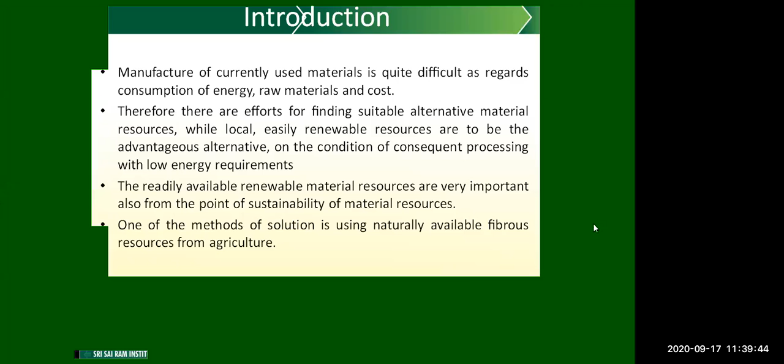Sharing, sir. Good morning. Shared? Yes, just sharing is showing, not the PPT. I'm Dr. P.K. Chidambaram. Good morning, sir. It's showing just screen sharing. Full mode. PPT is not coming. Prabhudas, is it visible? No, PPT is not visible, sir. Not visible, sir. Yes, sir. It is okay, sir. Visible. Now it is visible? Yes, it is visible, sir. Okay, shall we start? Yes, sir. We'll start, sir.

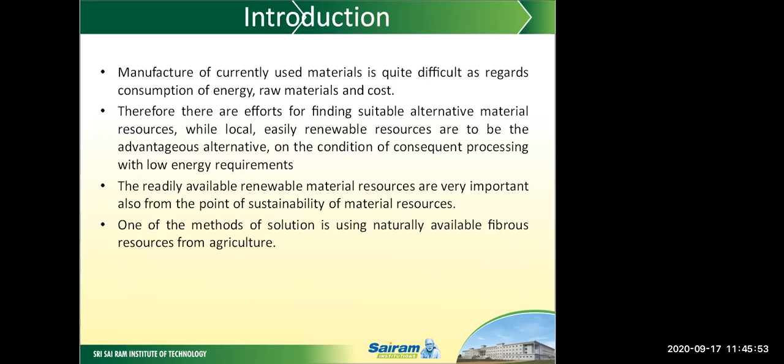The manufacture of currently used material is quite difficult as regards consumption of energy, raw material, and cost. When you are making the material, if you are able to reduce the energy consumption, this is also maintaining the sustainability. The sustainability maintenance for making the raw material is very, very difficult. Therefore, there are efforts for finding suitable alternative material resources, while local, easily renewable resources are the advantageous alternative on the condition of consequent processing with low energy requirement.

When you are using the local and easily available renewable material, these are alternative materials, and when you are making the components using these materials, you are able to save the energy. Also the manufacturing cost for the components can be reduced. So these materials require only less energy. With less energy, you are able to make the components easily by using renewable materials like biocomposites, which are produced from the plant fiber.

The readily available renewable material resources are very important also from the point of sustainability of material resources. So the readily available renewable material resources, which are available from the plant, are very, very important and are finding many applications, so that these materials can be easily used. One of the methods of solution is using naturally available fibrous resources from agriculture. If you are able to get the material from agriculture, these are the materials used for making the composites.

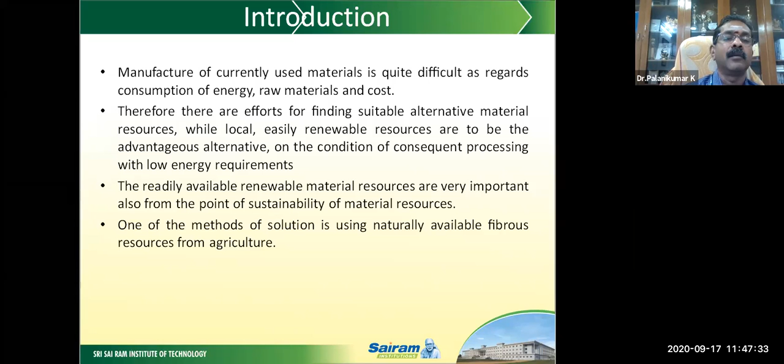The fibers extracted from plants are a type of renewable source and a new generation of reinforcements and supplements for polymer based materials. These fibers are renewable and cheaply available, and these are completely or partially recyclable. When you are talking about the plant fiber, almost all the plant fibers are completely recyclable. But when you are using this with synthetic resin, then this is partially recyclable. If you are going to use the bioresin, then the plant fiber and bioresin composites are completely renewable.

So these are naturally available when compared to the manufacturing of glass and related man-made fiber. These fibers are easily plucked from the plant, and we are able to have these kinds of materials very easily. These are biodegradable and environment friendly materials. Their availability, low density, and price, as well as satisfactory mechanical properties, make them attractive alternative reinforcement to glass, carbon, and other man-made fiber. So these kinds of materials are very useful in industry, even in the home, because of the price as well as satisfactory mechanical properties.

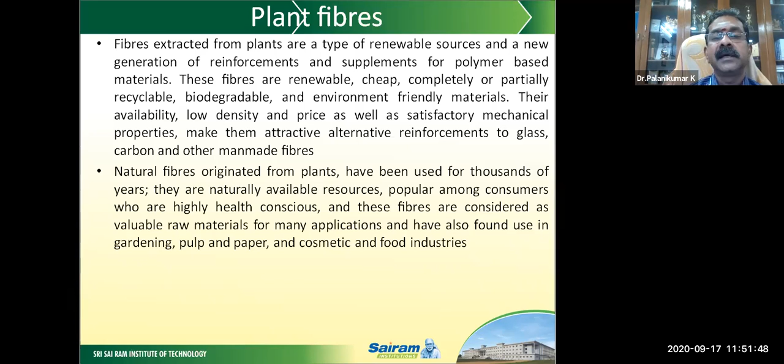They are naturally available resources, popular among consumers who are highly health conscious. When you are talking about people who are living in the forest and interior areas, even nowadays they are using the plant fiber for the construction of roofs and related material. And these fibers are considered valuable raw materials for many applications, and they have also found use in gardening, pulp and paper, cosmetic, and food industries. So using the plant fiber, we are able to have a lot of applications.

The fiber from plants such as cotton, hemp, jute, sisal, even pineapple, ramie, bamboo, banana, etc., as well as wood and the seeds of flax are used as the reinforcement in polymer matrix composites.

So when you are seeing the plant fibers, even those which are nearly available to you, like snake grass and milkweed fiber, these kinds of fibers are very easily available near you. If you are able to pluck them from the trees and convert them into fiber, these fibers are useful for making many products.

Among all the fiber plants, areca appears to be a promising reinforcing material because it is inexpensive, abundantly available, and a very high potential perennial crop. It belongs to the family Palmaceae, originated in the Malaya Peninsula and is cultivated in India and other countries in Asia.

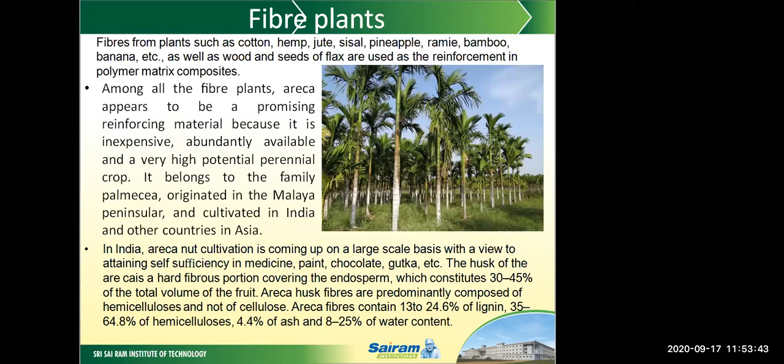For example, in India, areca nut cultivation is coming up on a large scale basis with a view to attaining self-sufficiency in medicine, paint, chocolate, gutka, etc. So these materials are used for manufacturing and making paint, chocolate, gutka, etc.

The husk of the areca is a hard fibrous portion covering the endosperm, which constitutes 30 to 45% of the total volume of the fruit. Areca husk fibers are predominantly composed of hemicelluloses and not of cellulose. Areca fibers contain 13 to 24.6% of lignin, 35 to 64.8% of hemicelluloses, 4.4% of ash, and 8 to 25% of water content.

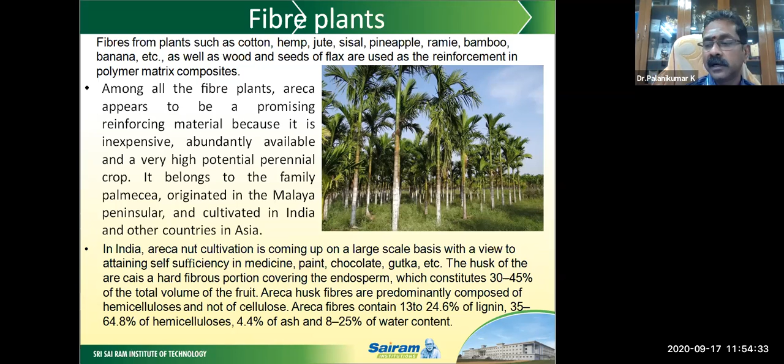Approximately 70 million metric tons of bananas are produced every year by the tropical and subtropical regions of the world. Even in Tamil Nadu, banana cultivation and the use of banana is extraordinarily widespread. Even in interior areas, wherever you go, we are able to see the banana tree.

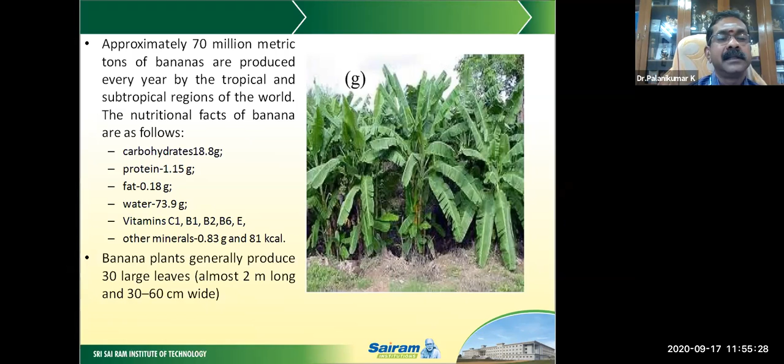The nutritional facts of banana are carbohydrates, protein, fat, water, vitamins, and other minerals. So the banana plants generally produce 30 large leaves, almost 2 meters long and 30 to 60 centimeters wide.

Hemp is another natural material which is abundantly available, and in many places they are growing hemp as an alternative resource for polymer composites. Hemp is naturally one of the most ecologically friendly fibers and also the oldest crop. The Columbia History of the World states that the oldest relics of human industry are bits of hemp fabric discovered in tombs dating back to approximately 8000 BC.

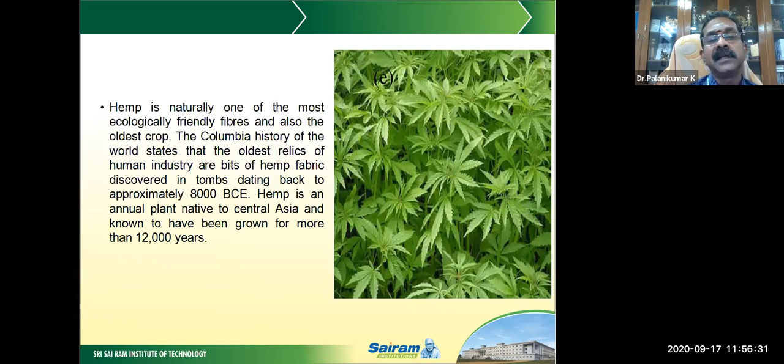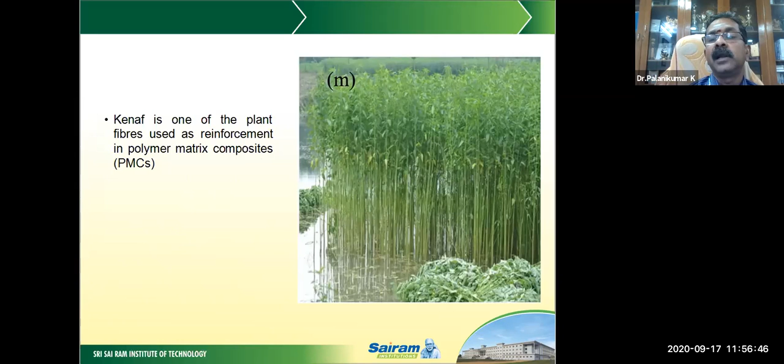Hemp is an annual plant native to Central Asia and known to have been grown for more than 12,000 years. So hemp is another alternative material, even used in India for making components. This is kenaf. In Tamil, we call it pulichakirai. This is another kind of plant fiber used as reinforcement in polymer matrix composites.

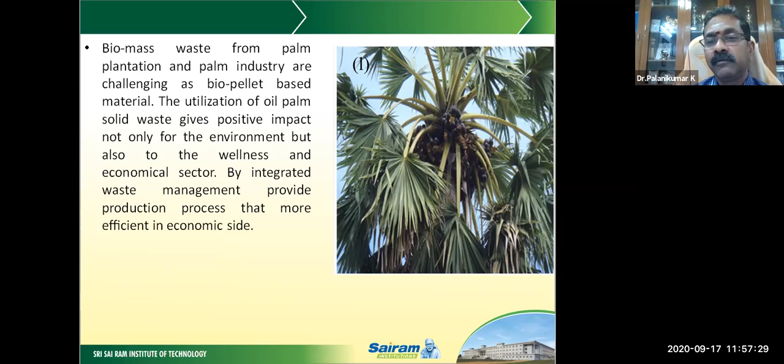So the biomass waste from palm plantations and the palm industry are challenging biopellet-based materials. The utilization of oil palm solid waste gives a positive impact not only for the environment but also for wellness and the economy. Integrated waste management provides a production process that is more efficient on the economic side. So when we are talking about the economic side, normally the palm fibers are used for making many components.

Jute is another fiber originating from the Tiliaceae family and takes nearly 3 months to grow to a height of 12 to 15 feet. The jute plant is cut and kept immersed in water for the retting process during the rainy season. Only by using this retting process are we able to get the fiber, so the retting process is also very important. The inner stem and the outer get separated, and the outer plant gets individualized to form fiber.

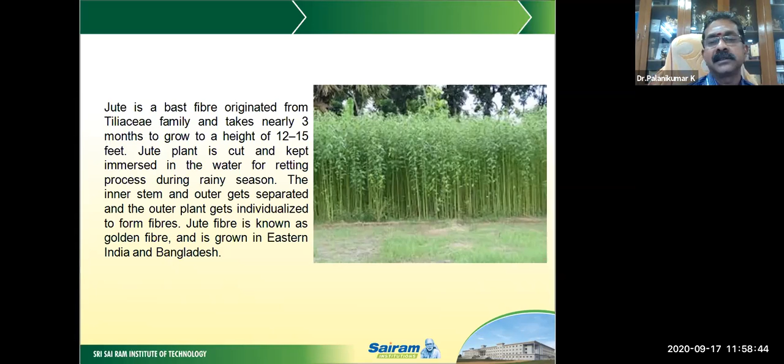Jute fiber is known as the golden fiber and is grown in eastern India and Bangladesh. So jute is normally used for making composites. Even sacks and many other things, we are making using jute. When you convert this jute into usable material by incorporating polymers, then we are able to have many products. These products are finding wide application in many industries.

Bamboo belongs to the grass family, which consists of cellulose fiber embedded in a lignin matrix. Bamboo has several advantages over other plant fibers, such as its low density, low cost, high mechanical strength, stiffness, high growth rate, and its ability to fix atmospheric CO2. Bamboo has some disadvantages, including high moisture content, the difficulty of extracting fine and straight fiber, and thermal degradation during manufacturing.

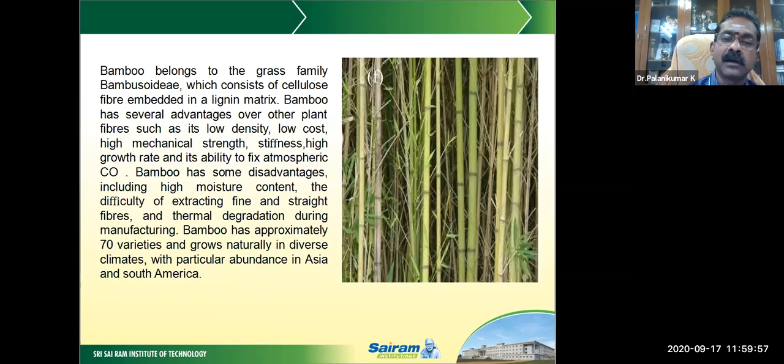Bamboo has approximately 70 varieties and grows naturally in diverse climates, with particular abundance in Asia and South America. The bamboo fibers are used for construction and related work also. So these are finding many applications.

Sisal fiber is a hard fiber extracted from the leaves of the sisal plant. Though native to tropical and subtropical North and South America, the sisal plant is now widely grown in Africa, the West Indies, and the Far East. A sisal plant produces about 200 leaves, and each leaf contains around 1000 fibers.

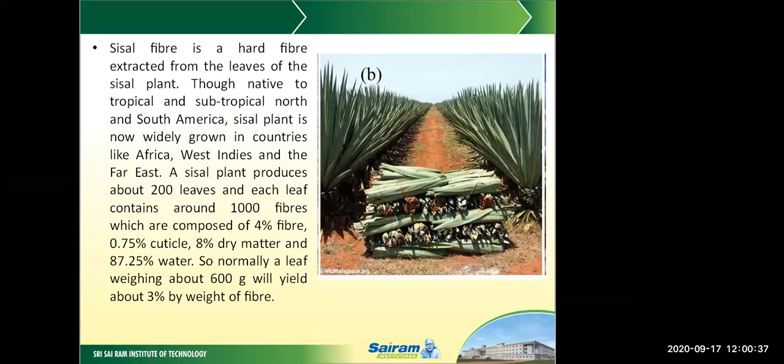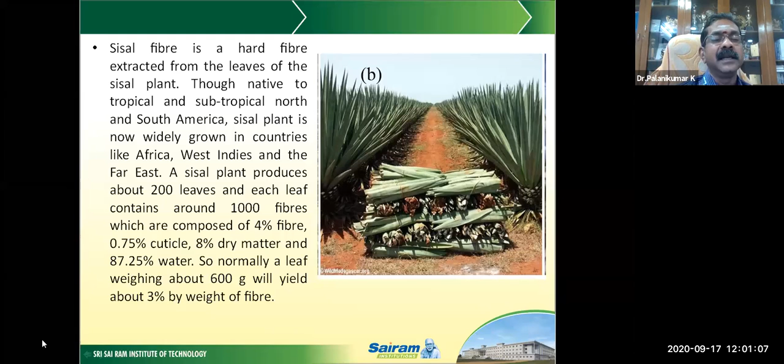These are composed of 4% fiber, 0.75% cuticle, 8% dry matter, and 87.25% water. Normally, a leaf weighing about 600 grams will yield about 3% by weight of fiber. So sisal is the plant, and using this plant we are able to extract the fiber. It yields fiber easily, but using sisal we are able to get only 3% by weight of fiber.

Pineapple leaf fiber, or PALF, is another fiber which is used on different occasions and in different fields. These are obtained from the leaves of the plant belonging to the Bromeliaceae family. Pineapple is largely cultivated in tropical countries, mainly for its fruit. Its cultivation in India is substantial. About 22 lakh 50,000 acres of land is cultivated and it is increasing. In the future, a considerable increase in the production of the fiber is envisaged.

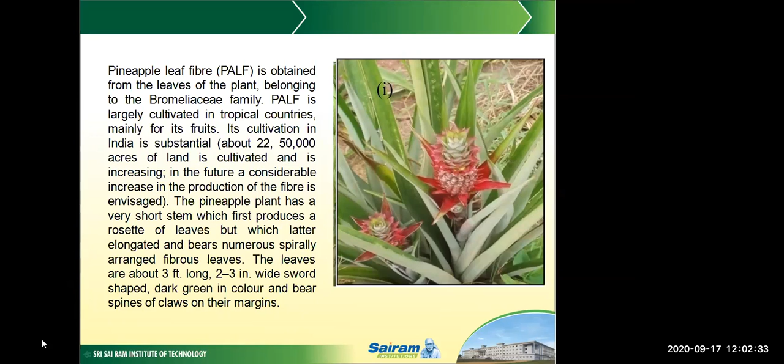So pineapple leaf fiber is another important area where we are able to explore more fiber. The pineapple plant has a very short stem, which first produces a rosette of leaves, but which later elongates and bears numerous spirally arranged fibrous leaves. The leaves are about 3 feet long, 2 to 3 inches wide, sword shaped, dark green in color, and bear spines or claws on their margin.

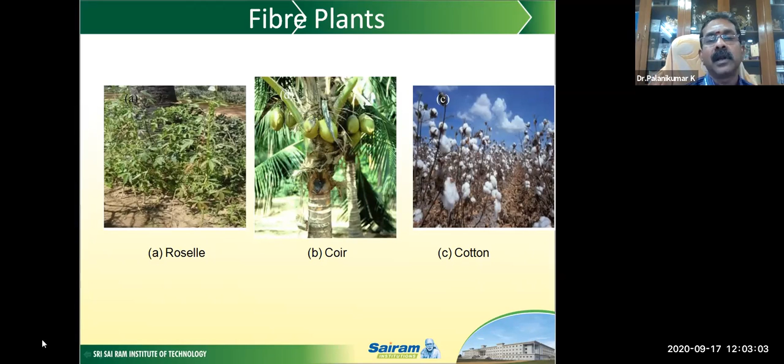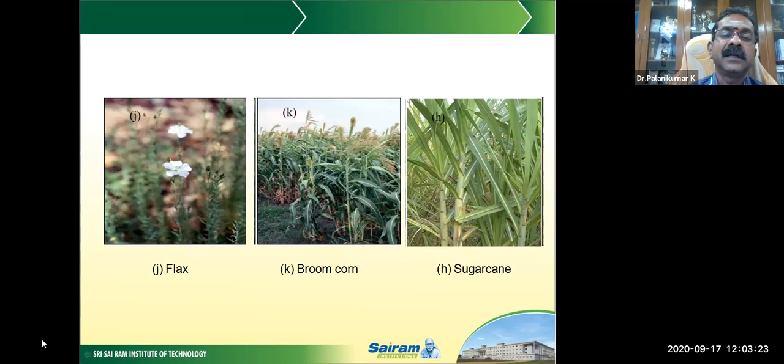So these are some of the fiber plants available. The first one is the roselle fiber, the second one is the coir fiber, and the third one is the cotton fiber. Even from the cotton, we are able to get the fiber. These fibers are converted into cloth and other devices. So the roselle, coir, and cotton are also fiber plants. Other plants are flax, broom corn, and sugar cane. These are some other plants from which we are able to get more fiber.

All of you, please mute. Please mute your mic, Prabhudas.

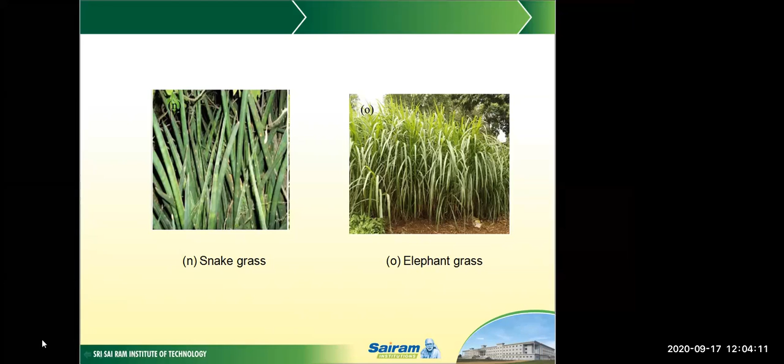Elephant grass is another fiber used. So these are the classifications of plant fiber. We are able to get plant-based fiber from different sources. If you take the bast or stem, you are able to get the fiber. If you take the leaf, the seed, or the stalk, you are able to get the fiber. Even from grass or reed, you are able to get the fiber. From wood also we are able to get fiber, that is hard or soft.

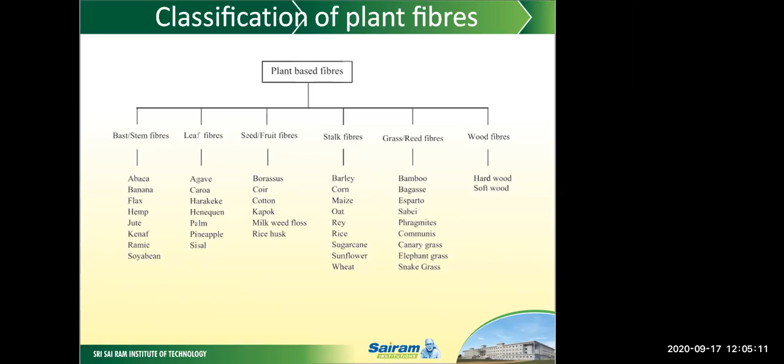So these are the different kinds of fiber we are able to extract from different parts of the plant, not only from the leaf, not only from the bast. The bast or stem fiber. Bast or stem fibers are generally separated from the extreme outer part of the plant stem. Examples are jute, flax, abaca, hemp, ramie, banana, and soybean. These fibers are extracted by a retting process, accomplished by means of biological or chemical degradation of plant stems.

Another one is the leaf fiber, the coarse and hard fibers extracted from the leaf of the plant by hand scraping after beating or using a retting process. We are also able to extract it by mechanical extraction. Due to the relatively high strength, these fibers are mainly used for making woven ropes, fabrics, carpets, mats, etc.

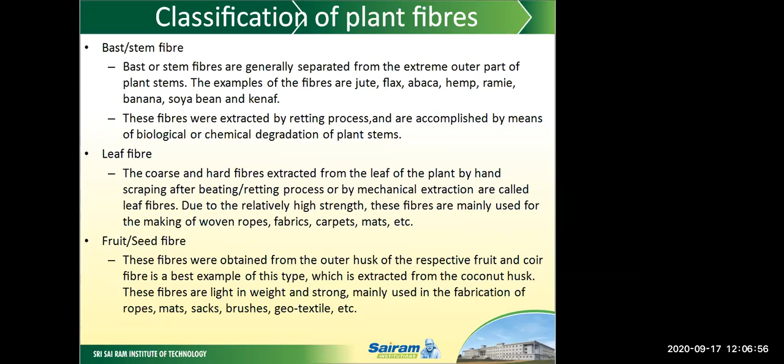Fruit or seed fiber. These fibers are obtained from the outer husk of the respective fruit, and coir fiber is the best example of this type, which is extracted from the coconut husk. These fibers are light in weight and strong, mainly used in the fabrication of ropes, mats, sacks, brushes, geotextiles, etc.

Stalk fiber. These fibers are extracted from the plant stalks and are generally obtained from plants such as maize, sugarcane, corn, eggplant, sunflower, wood, and from the straws of various crops such as barley, wheat, rice, etc. So even by using the stalk, we are able to extract the fiber.

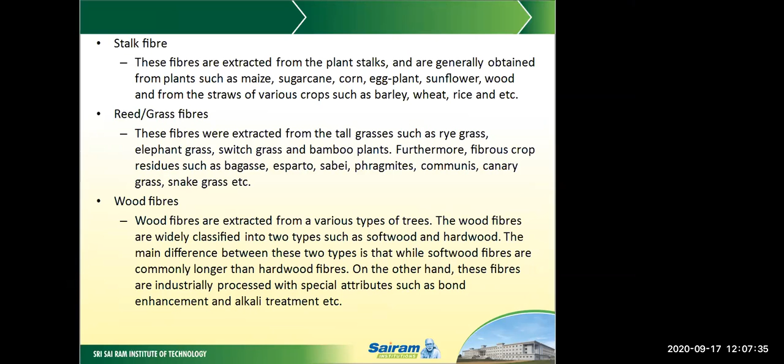Reed or grass fiber. These fibers are extracted from tall grasses such as ryegrass, elephant grass, switchgrass, and bamboo plants. So these are the grass plants. Even in the grass, we are able to get the fiber. Furthermore, fibrous crop residues such as bagasse, esparto, sabei, phragmites, communis, canary grass, snake grass, etc.

Also used for manufacturing of the fiber. Wood fiber. Wood fibers are extracted from various types of trees. The wood fibers are widely classified into two types, such as softwood and hardwood. So the main difference between these two types is that softwood fibers are commonly longer than the hardwood fiber, and also the strength differs.

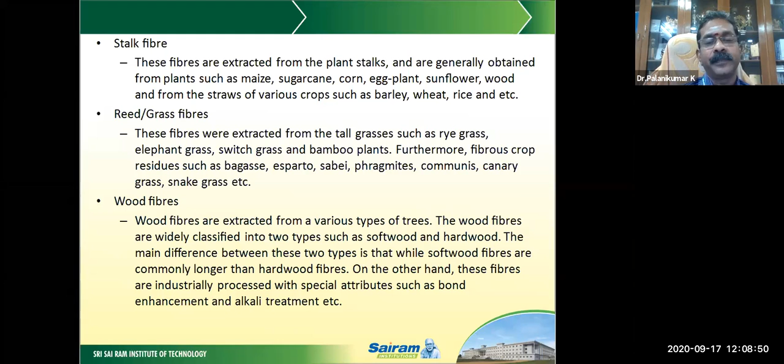On the other hand, these fibers are industrially processed with special attributes such as bond enhancement and alkali treatment, etc. So these are the fibers which are extracted from the different parts of the tree or grass or a plant.

Extraction of plant fiber. So after getting the leaf or bast or something else from the plant, we must extract the fiber. How are we able to extract the plant fiber? A process where the inner stem and outer get separated and the outer plant gets individualized to form a fiber is called retting. The separation of fibers from the core tissues after the retting process.

Single fibers from the plant strand fibers are usually obtained by manual or mechanical separation processes or by using the decorticator. So retting is the process used to extract the fiber.

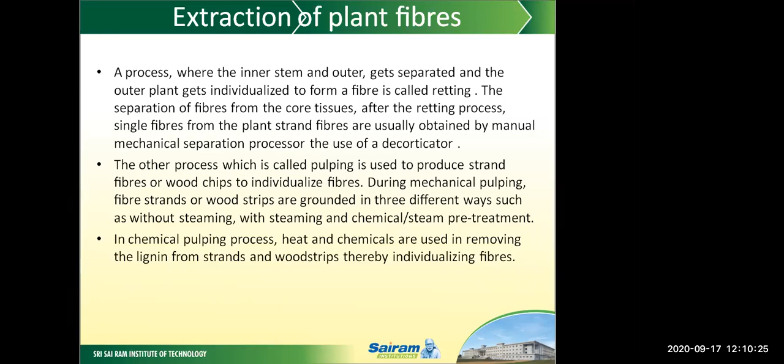The other process, which is called pulping, is used to produce strand fiber or wood chips to individualize fiber. During mechanical pulping, fiber strands or wood strips are ground in three different ways, such as without steaming, with steaming, and chemical steaming or pre-treatment. So using these processes, we are able to extract the plant fiber.

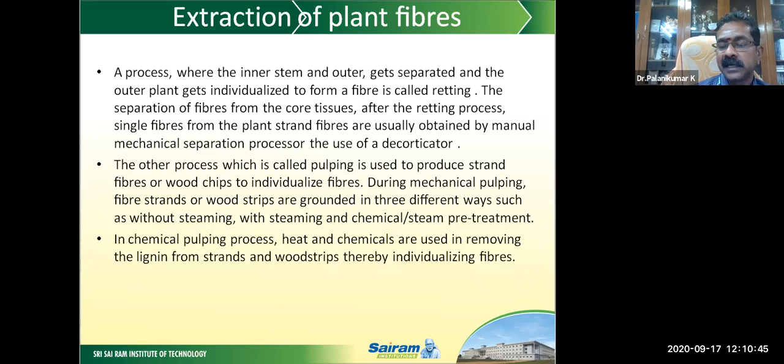In the chemical pulping process, heat and chemicals are used in removing the lignin from strands and the wood strips, thereby individualizing the fiber. So the fibers can even be individualized by using the chemical pulping process.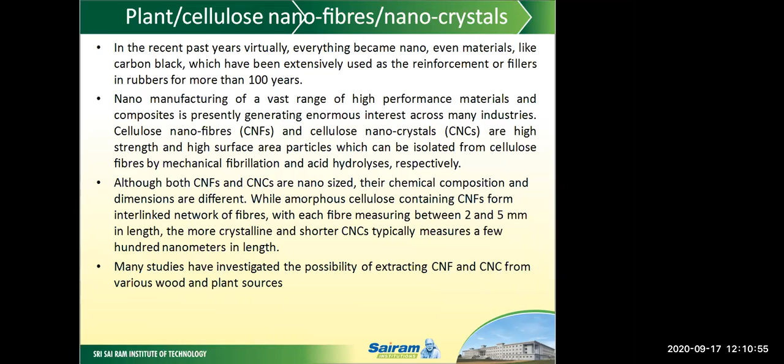In the recent past years, virtually everything became nano. Even materials like carbon black, which have been extensively used as reinforcement or fillers in rubber for more than 100 years. Nano manufacturing of a vast range of high performance materials and composites is presently generating enormous interest across many industries.

Cellulose nanofibers, or CNFs, and cellulose nanocrystals, CNCs, are high strength, high surface area particles which can be isolated from cellulose fiber by mechanical fibrillation and acid hydrolysis respectively. Although both CNFs and CNCs are nano-sized, their chemical composition and dimensions are different. We are even able to have nano-sized fiber, so these are able to find applications in many industries nowadays.

So like nanomaterials, the nanofibers and nanocrystals are also finding many applications, and these are available from the plant fiber. While amorphous cellulose containing CNFs form interlinked networks of fiber, with each fiber measuring between 2 and 5 mm in length, the more crystalline and shorter CNCs typically measure a few hundred nanometers in length. Many studies have investigated the possibility of extracting CNF and CNC from various wood and plant sources.

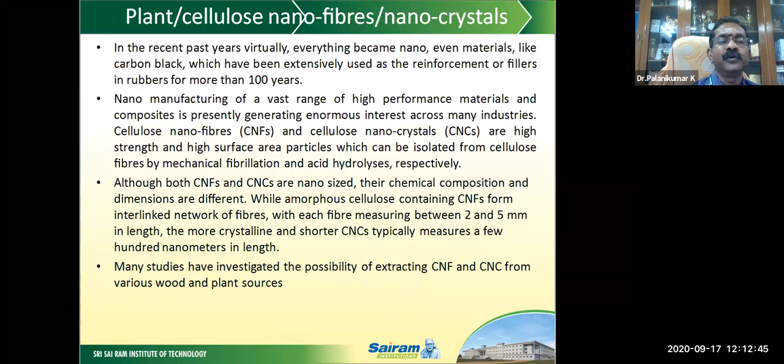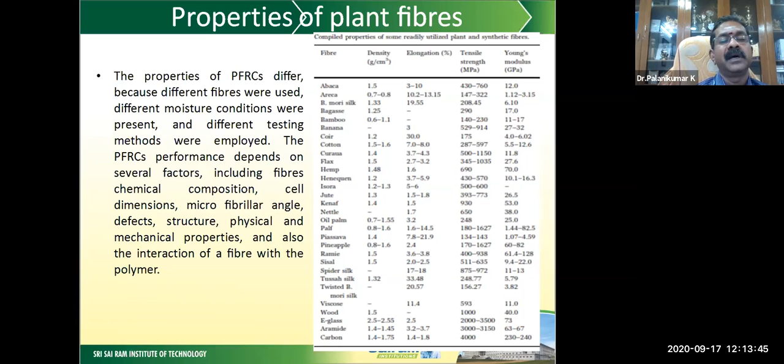The PFRC's performance depends on several factors, including the fiber's chemical composition, cell dimensions, microfibrillar angle, defects, structure, physical and mechanical properties, and also the interaction of the fiber with the polymer.

PFRCs can be a combination of plant fiber and synthetic resin, or plant fiber and biodegradable resin. Both synthetic and biodegradable resins can be either thermoset or thermoplastic type. So we are able to use either thermoset or thermoplastic for manufacturing the plant fiber reinforced composite.

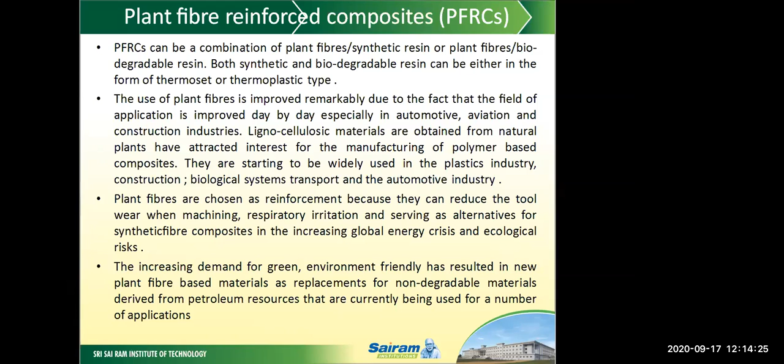The use of plant fiber has improved remarkably because the field of application is growing day by day, especially in automotive, aviation, and construction industries. Lignocellulosic materials are obtained from natural plants and have attracted interest for the manufacturing of polymer-based composites. They are starting to be widely used in the plastics industry, construction, biological systems, transport, and the automotive industry.

Plant fibers are chosen as reinforcement because they can reduce tool wear when machining and respiratory irritation, and serve as an alternative for synthetic fiber composites amid the increasing global energy crisis and ecological risk. When you are using synthetic fiber, we can have respiratory irritation, and also machining is somewhat difficult, so plant fibers are finding more applications than that kind of fiber.

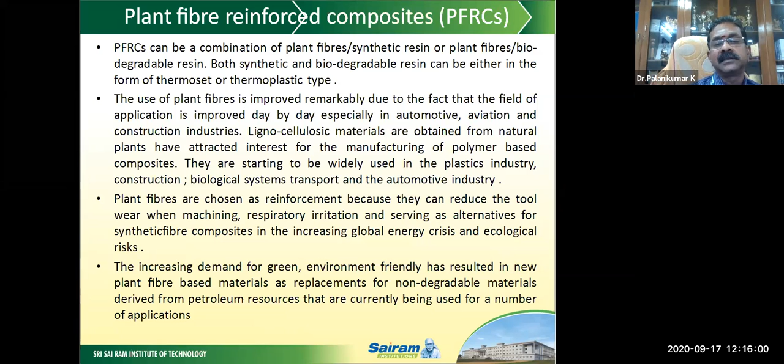The increasing demand for a green, environment friendly approach has resulted in new plant fiber based materials as replacements for non-degradable materials derived from petroleum resources that are currently being used for a number of applications. So the materials that are extracted from petroleum resources are also replaced by plant fiber.

The matrix, fiber, and other additives are compounded through different methods to form a composite. When manufacturing the composite, we have the matrix and the fiber. If you use different kinds of matrix like epoxy, polyester, or biopolymer, we get different strength and other characteristics.

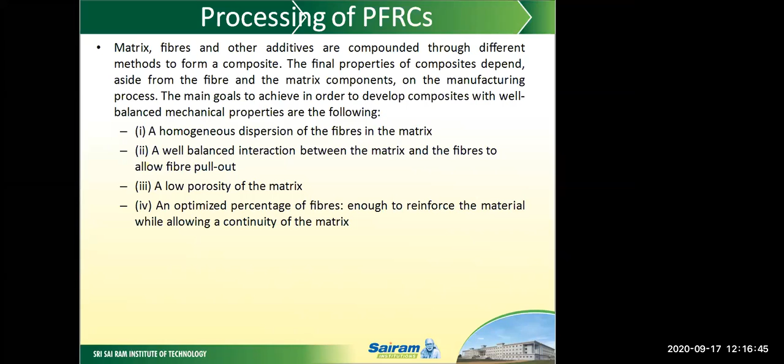The final properties of composites depend, aside from fiber and matrix components, on the manufacturing process. The main goals to achieve well-balanced mechanical properties are: first, a homogeneous dispersion of the fiber. Equal distribution of the fiber throughout the matrix is essential for manufacturing the composite.

A well-balanced interaction between the matrix and the fibers to allow fiber pull-out is essential for manufacturing the component. Also required is a low porosity of the matrix.

When manufacturing the component, you must remove holes and other defects in the matrix, which lead to porosity. Manufacturing the material without porosity is important. Also needed is an optimized percentage of fiber, enough to reinforce the material while allowing continuity of the matrix.

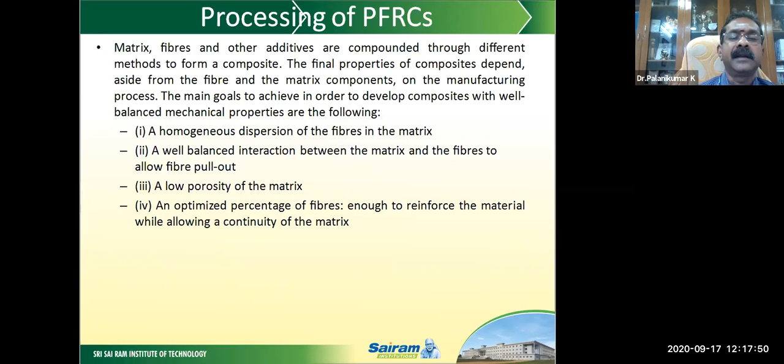The properties of plant fiber reinforced composites depend on a number of parameters such as volume fraction of the fiber, fiber aspect ratio, fiber-matrix adhesion, stress transfer at the interface, and fiber orientation.

Fiber orientation means keeping the fiber at a particular angle; that indicates the orientation. The orientation may be 0 degree, 30 degree, 60 degree, or 90 degree according to the requirement.

The main factors affecting the properties of PFRCs are fiber selection, including the type of fiber, the harvest time required for manufacturing, the extraction method considered, aspect ratio, treatment used for making, and fiber content.

Treatment means we give a chemical treatment so that unwanted things from the fibers are removed, so that the fibers get strong.

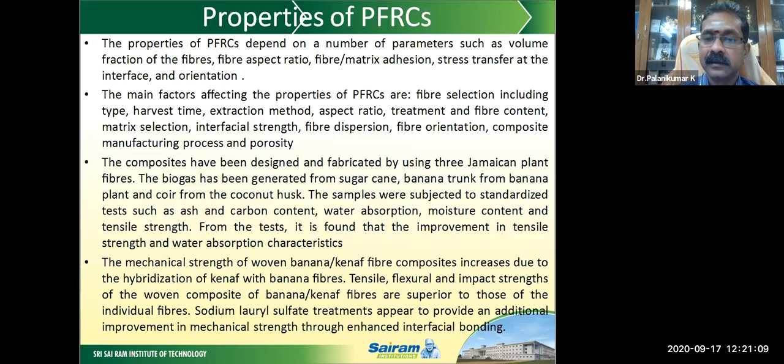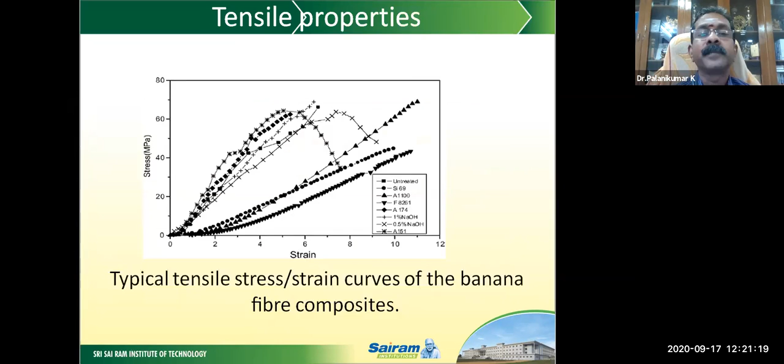This is the typical tensile stress-strain curve for the banana fiber reinforced composite. This is the typical flexural stress-strain curve of banana fiber composite at different percentage levels and other conditions.

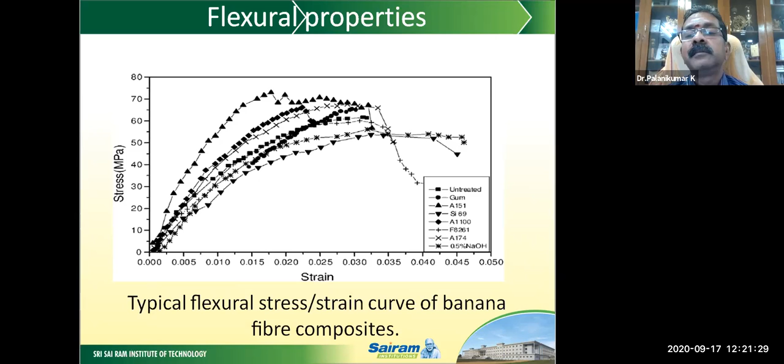This shows the impact properties, flexural strength, and flexural modulus comparison of kenaf fiber. This is the flexural strength obtained for kenaf fiber reinforced composites.

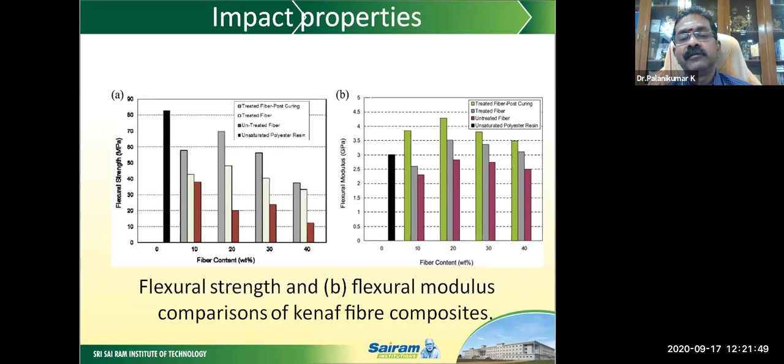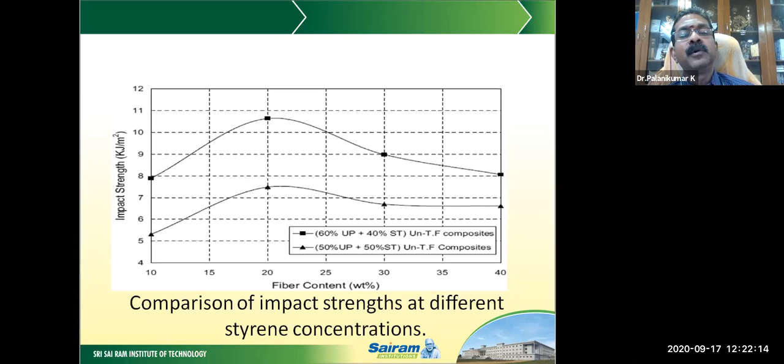This is the comparison of impact strength at different styrene concentrations. Styrene is a chemical used to remove unwanted things in the fiber, and also to remove water content. If we give the styrene treatment, we are able to improve the strength of the fiber.

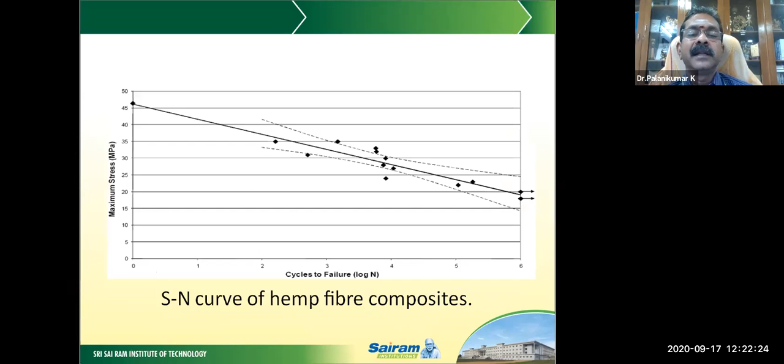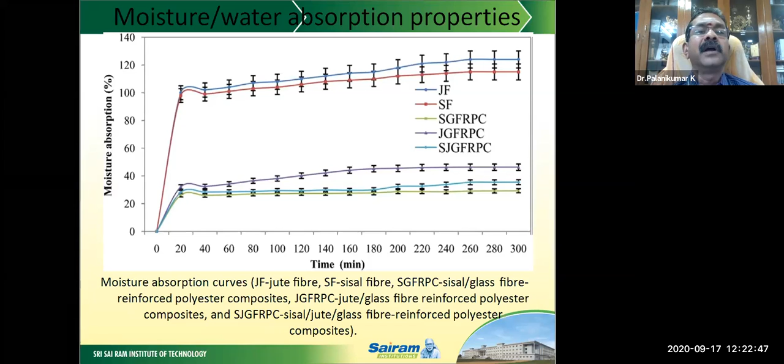This is the S-N curve for hemp fiber reinforced composites. This is the moisture absorption curve for jute fiber, sisal-glass fiber reinforced polyester composite, jute-glass fiber reinforced polymer composite, and sisal-jute-glass fiber reinforced polymer composite. For different composites, the moisture and water absorption properties are provided.

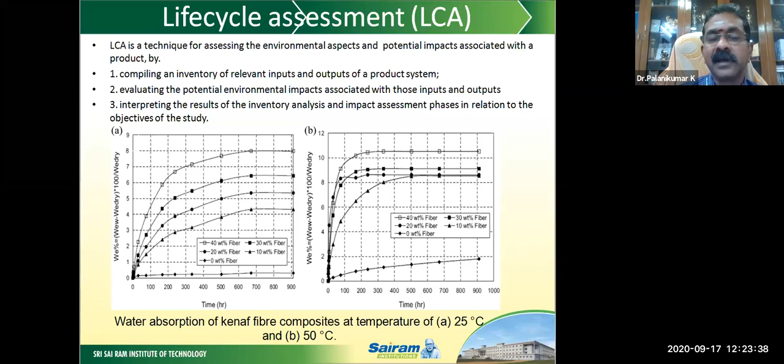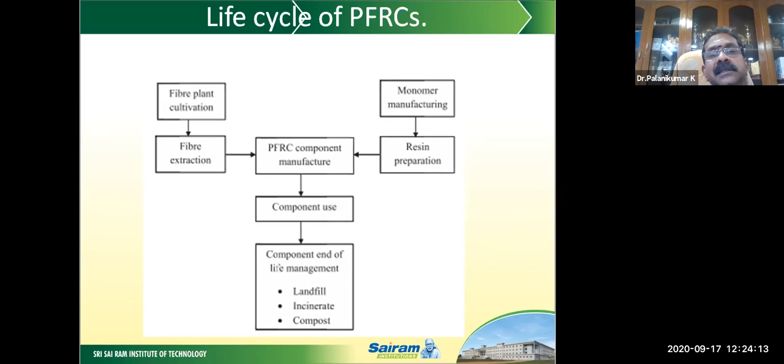The life cycle assessment covers fiber plant cultivation, fiber extraction, and on the other side monomer manufacturing and resin preparation. Then we have PFRC component manufacture. Once the component is used, end-of-life management includes landfill, incineration, and composting.

These life characteristics are also analyzed to study the life cycle of plant fiber reinforced composites. For wear properties, abrasive wear studies were carried out under multi-pass condition on a pin-on-disc type wear testing machine.

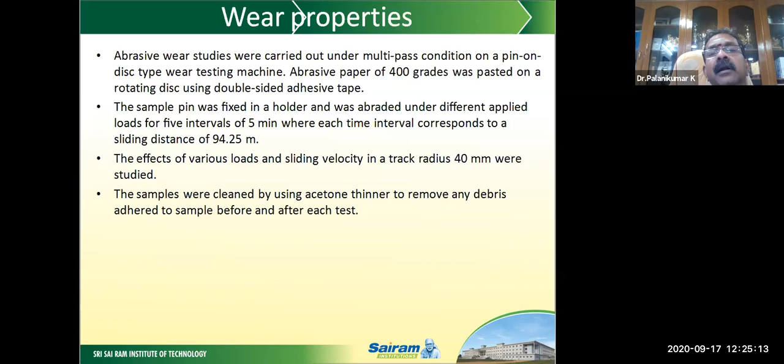Abrasive paper of 400 grades was pasted on a rotating disc using double-sided adhesive tape. The sample pin was fixed in a holder and abraded under different applied loads for 5 intervals of 5 minutes, each time interval corresponding to a sliding distance of 94.25 meters. The effect of various loads and sliding velocity at a track radius of 40 mm were studied. Samples were cleaned using acetone thinner to remove debris before and after each test. This is the wear test conducted on pin-on-disc using the abrasive sheet.

Then vibration frequency analysis: an analytical formulation for the vibration analysis of the composite laminate with delamination. Once you manufacture the composite, vibration or frequency analysis is also very important, since multiple delaminations significantly affect the dynamic characteristics of composite laminated beams.

Experimental work was performed on delaminated beam specimens made by semi-autoclave. Delamination was made by inserting Teflon film between the interfaces of the prepreg. An analytical formulation of the composite beams for vibration analysis was studied to show the effect of size and location of multiple delaminations on the natural frequencies.

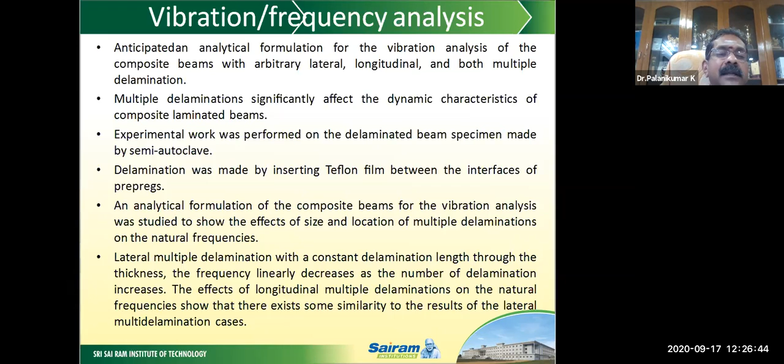Thermal properties are another essential property to measure. The thermal properties of jute and banana fiber were obtained by performing thermogravimetric analysis and heat deflection temperature analysis. TGA measures the amount and rate of change in the weight of a material as a function of temperature or time in a controlled atmosphere.

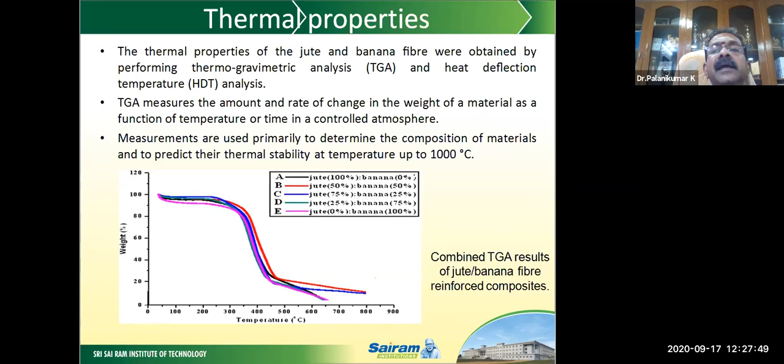Measurements are used primarily to determine the composition of materials and to predict thermal stability up to 1000 degrees centigrade. These thermal properties were measured by TGA, or thermogravimetric analysis.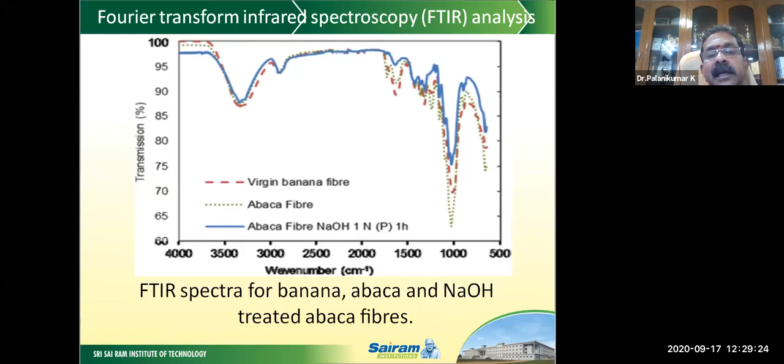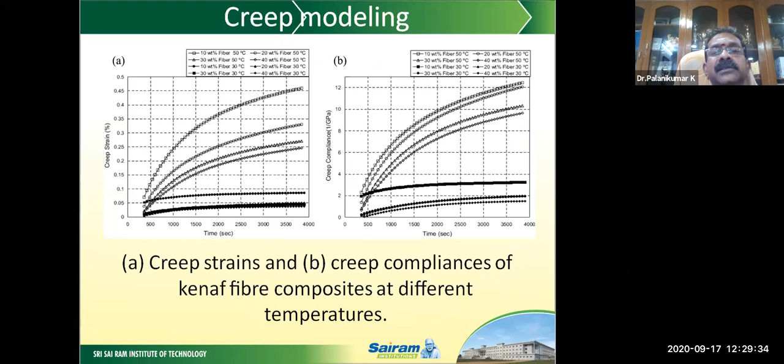This shows creep strain and creep compliance of kenaf fiber composite at different temperatures. Next is the morphological or surface property: this is the surface structure obtained for jute, flax, and hemp.

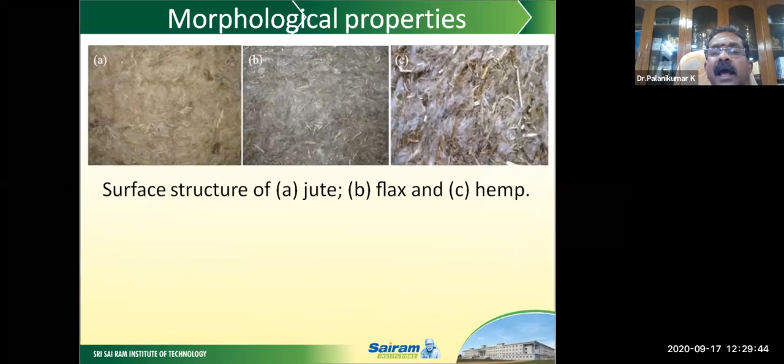This is the 3D reconstructed volume visualization obtained by X-ray tomography of A. flax fiber, B. hemp fiber, and C. miscanthus fiber.

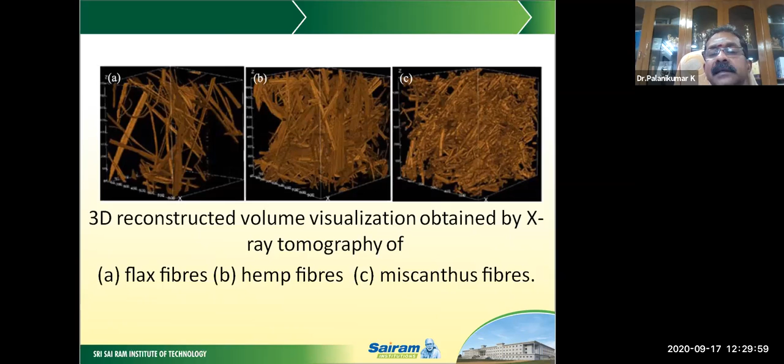These are micrographs of cotton fiber: A untreated, B treated with sodium hypochlorite bleach for 10 hours, C treated with sodium hypochlorite bleach for 12 hours, D treated with cellulase for 4 hours, E treated with cellulase for 8 hours, and treated with cellulase for 12 hours. Comparing these, different results are obtained when using cellulase.

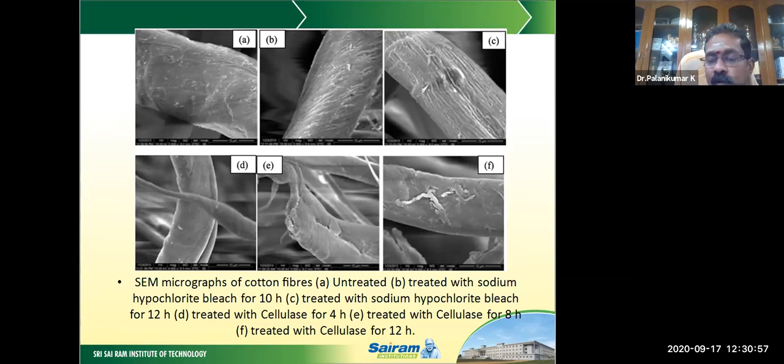This is the tensile fractured surface of the banana fiber composite. A, B, C are for untreated fiber, and D is for NaOH treated, E benzoylated, and F KMnO4 treated fiber.

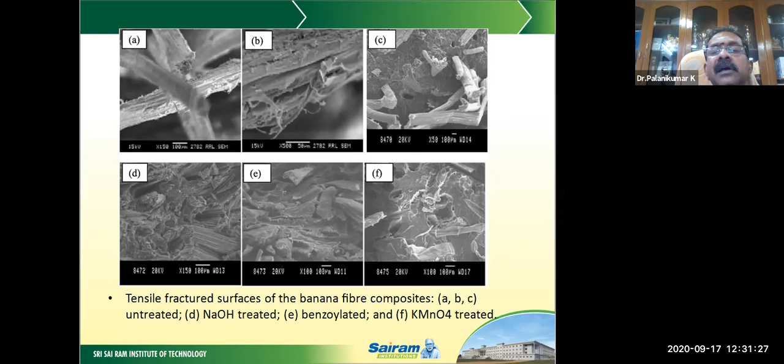The different treatments give improvement in properties. The burrs and other defects are removed so that we are able to get a smooth surface.

These are images of untested spicule fiber showing surface defects. B is the failed surface of a dry spicule fiber tested in tension, and C is the failed surface of a dry spicule sample in bending.

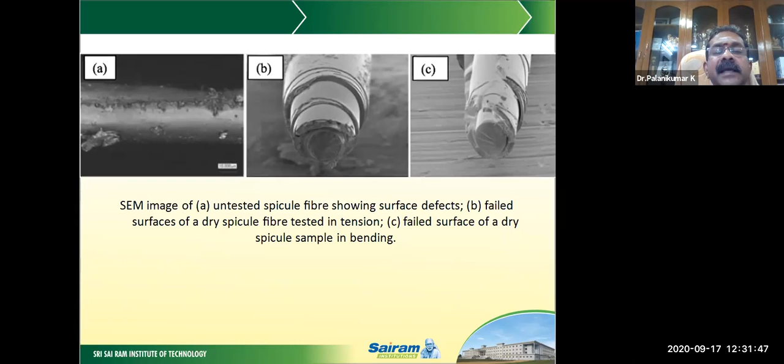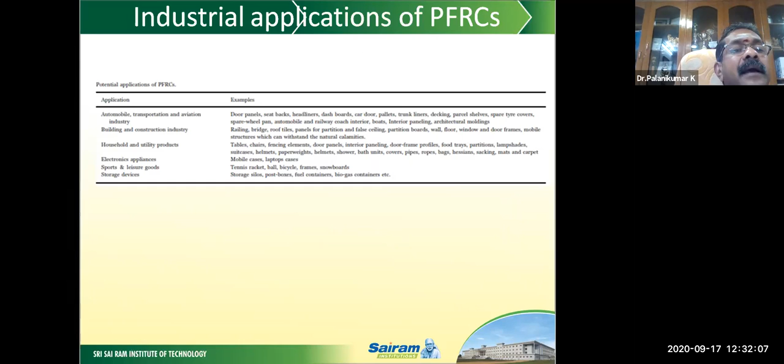The industrial applications of plant fiber composites are wide-ranging. Plant fibers are finding applications in automobile, transportation, building, electronics appliances, sports, and many other kinds of applications.

Summary. PFRCs with an outstanding combination of properties are not a dream today. Using plant fiber reinforced composites, we are able to have many kinds of applications. Nowadays, day-to-day applications are available for PFRCs. Even many components in Benz cars are manufactured using polymer-based composites, and some parts in many cars are manufactured using plant fiber.

Use of proper processing techniques, fiber treatment, compatibilizers, and coupling agents can lead to composites with optimum properties for a particular application. Recently, there has been increased interest in commercialization of PFRCs, especially for interior paneling in the automobile industry. Previously, PFRCs were manufactured only on a small scale; now they are manufactured on a larger scale and are finding many applications, especially for interior paneling in the automotive industry.

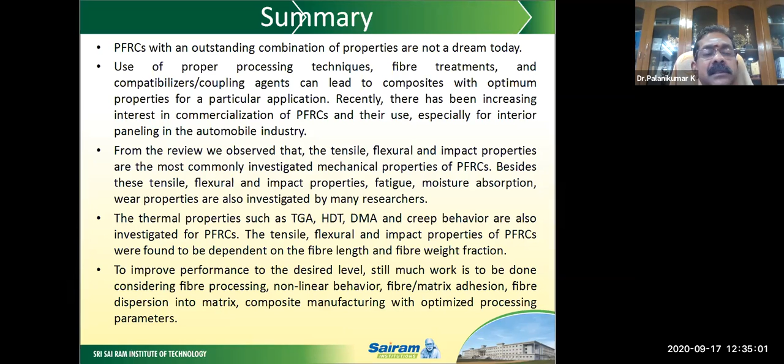To improve the performance to the desired level, much work is still to be carried out considering fiber processing, non-linear behavior, fiber matrix adhesion, fiber dispersion into matrix, and composite manufacturing with optimized processing parameters. In the future, these composites will see increased use in structural applications, and various other applications depend on their further improvement.

But there are still a number of problems that have to be solved before PFRCs become fully competitive with synthetic fiber composites. They are sustainable and could be fully recyclable, but could be more expensive if fully bio-based and biodegradable, and they are extremely sensitive to moisture and temperature. Manufacturing these composites with a fully biodegradable resin is somewhat difficult. If a proper matrix is used, PFRCs could be 100% biodegradable, but their biodegradation can be difficult to control.

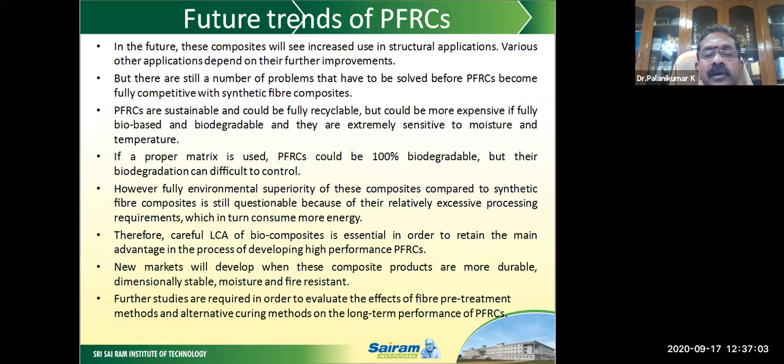However, the full environmental superiority of these composites compared to synthetic fiber composites is still questionable because of their relatively excessive processing requirements, which in turn consume more energy. Therefore, careful LCA, life cycle assessment, of biocomposites is essential in order to retain the main advantages in developing high performance PFRCs. New markets will develop when these composite products are more durable, dimensionally stable, and moisture and fire resistant. Further studies are required to evaluate the effects of fiber pre-treatment methods and alternative curing methods on the long-term performance of PFRCs.

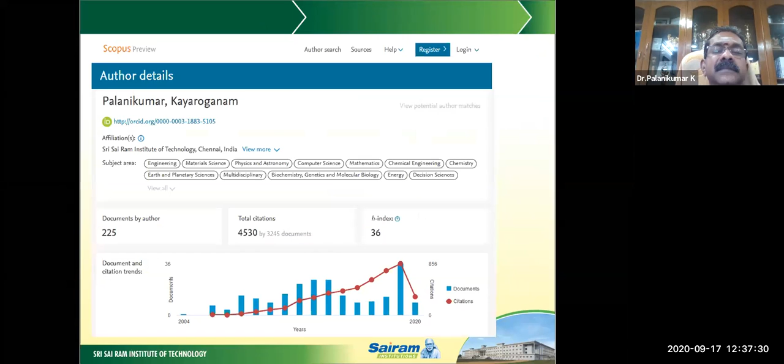These are the credentials for me. Total publications: 414. Science Citation Index articles: 143. Scopus indexed articles: 225. Google Scholar listed articles: 381. This is my Scopus h-index, now 36.